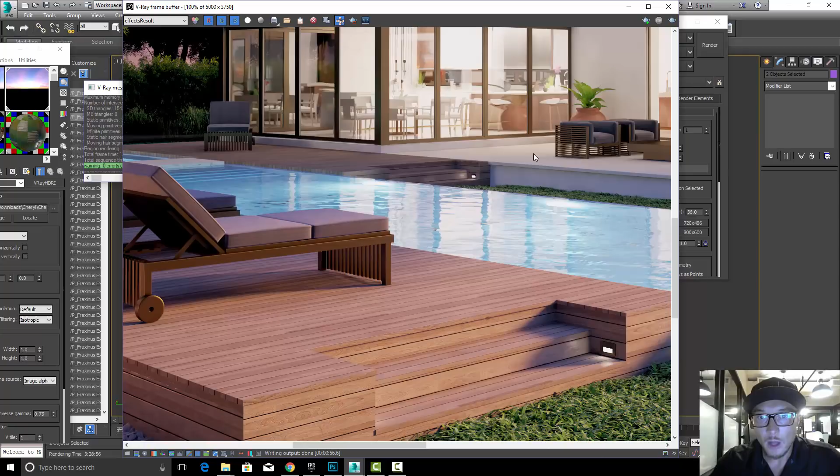As you see here, it's looking not too shabby. The rendering time took 3 hours, 28 minutes and 56 seconds. We're using high quality rendering at 5000 pixels, but pretty low quality settings, because 5000 pixels normally takes about 5-6 hours to render, but I lowered it down so you can see the rendering time. The settings are 1 and 6, 0.1 threshold, and only 35, very low, 250 for the light cache. So pretty low rendering settings, but the result is pretty good, and it's good enough to have it in 5K.

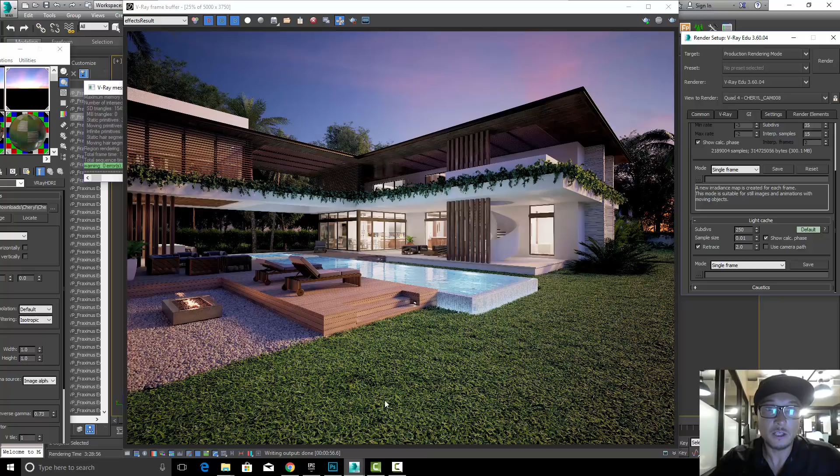Okay, so now let's go and install our VRay Next here. I'm going to log into my download panel from Chaos Group, get the one for 2016, and we're going to install our VRay.

Alright, so the installation was done, but we can see here it didn't uninstall the old version. So let's see what's going on. Okay, that's the license server. In order to work with this one, the VRay that started already from the previous version 3.6, we need to log in to our local server and activate our VRay. The information of that activation is going to be sent to all those that are going to purchase it commercially. I'm not going to waste time showing that, I'm just going to go straight to rendering and open my file.

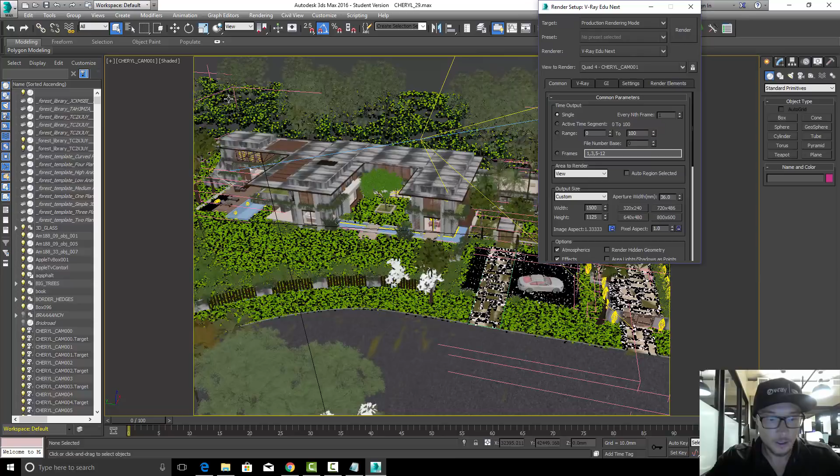Alright, so this scene is open. Let's open our VRay. Yep, VRay Next is installed, and everything is looking pretty good. So let's get back to our camera here.

Put 5000. One and 6, like it was earlier. Low, this didn't change. Alright, and click render. Oh, and now my Forest Pack is saying that it needs to be updated. This stuff needs to be green here.

Alright, so in order to fix this, I had to go to my iToo Software and download the 6.1 update, because it works with VRay Next. So I got the update, let's install it. Alright, so we got a bunch of goodies here with the new library. It's gonna take some time to install this, there's a bunch of stuff here. Alright, the package was updated.

Now let's fire up our scene. Forest Pack texture path must be included in customize. Do them automatically, of course.

Now if you guys noticed earlier, there are two options here for VRay Next, GPU and CPU. I'm gonna use the CPU one, but the GPU also comes with it. It's very similar to Corona's live rendering thing, RT style, real time. Alright, so the settings are the same here, as you can see, very low.

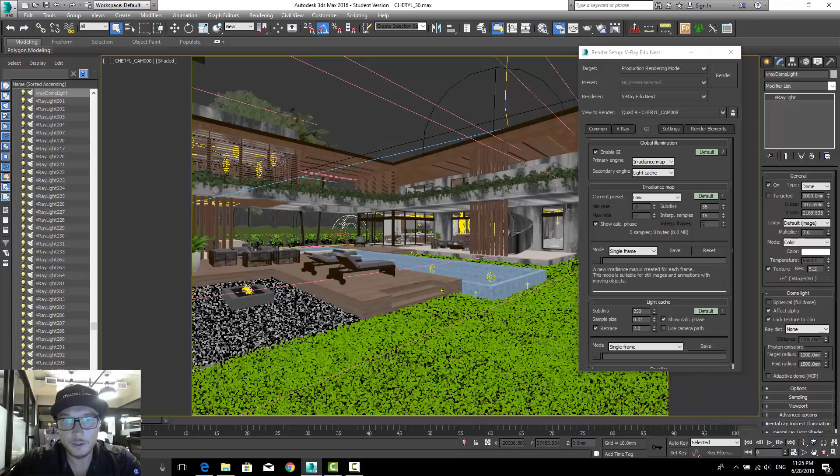So let's use the new option of the optimized VRay dome light here. If we scroll down in options, right here, adaptive dome. That's supposedly going to speed up the entire render by up to 7 times.

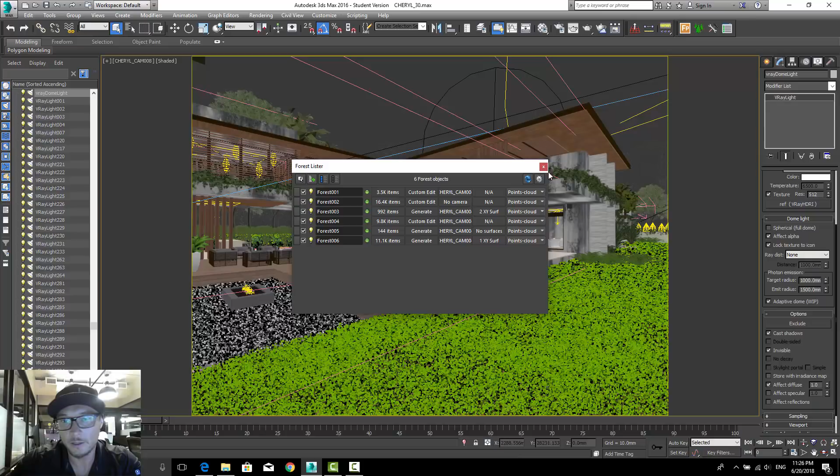Now let's fire up our render. Before that, let's check that our Forest Pack is working. Click on refresh, all the buttons green, that's cool. Now we can click render and see how long this scene will take to render.

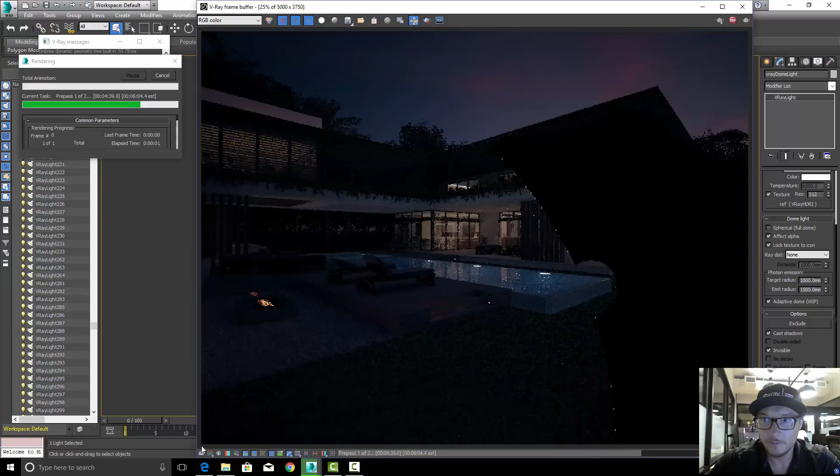Light cache went pretty fast, first pass going fast. The vents are working full speed, and I'm using the Alienware, the computer that I just got, to render this. It's actually a laptop, not a desktop, which is not recommended, but just because I'm on the go doing tests and research work while traveling, this one is just perfect.

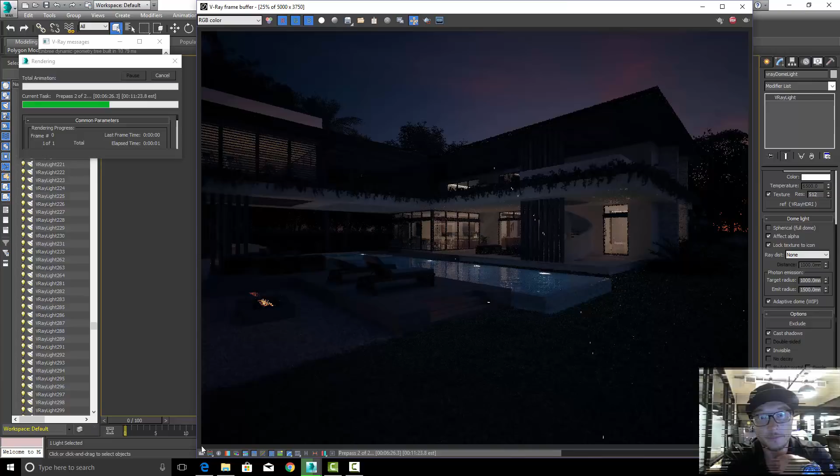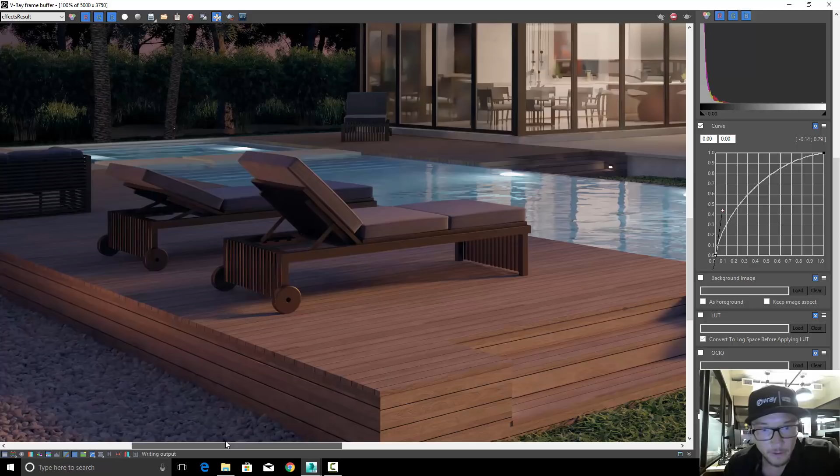Alright, so the render is done. We can see the quality is pretty good, everything is looking very sharp and, most important, noise free. This is thanks to our new denoiser. I haven't shown you the one that NVIDIA AI put into the GPU, but this is the denoiser that we use. We can see some grain going on here, and the minute we use the effect, everything becomes crystal clear. Pretty good stuff. So, 3 times faster, from 3 hours to 1 hour, huge improvement.

VRay Next got a bunch of cool options: auto exposure, auto white balance. I played here with the VRay frame buffer to fix that stuff, but we're gonna have all of those things automatically implemented, which can also be transferable to your camera after using the automatic values.